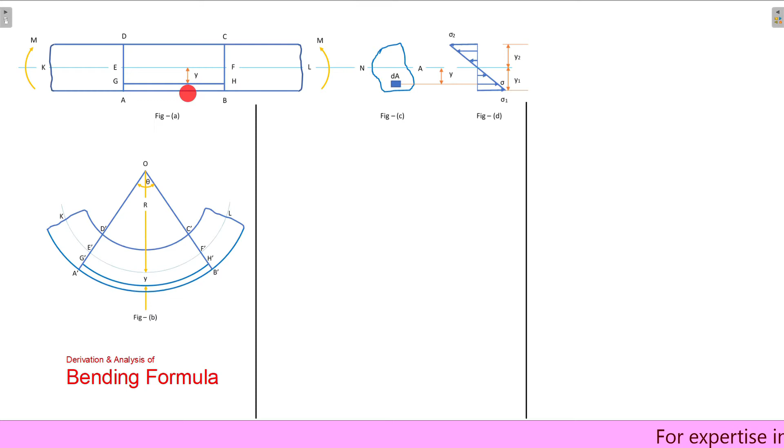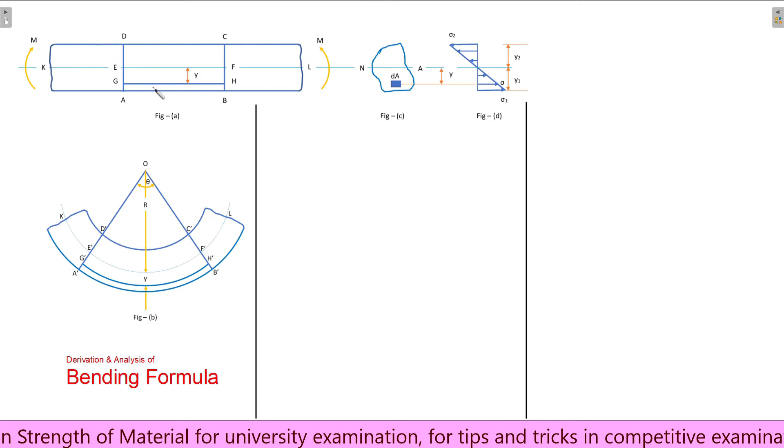Let us say we have a beam portion which is subjected to simple bending as shown in figure A. The direction of bending moment is clearly visible with these yellow arrows, and from this direction of moment we can see the beam will bend something like this, or we can say the beam will sag. This means at the top surface of the beam CD the compressive stress will be generated, and at the bottom surface at AB the tensile stress will generate.

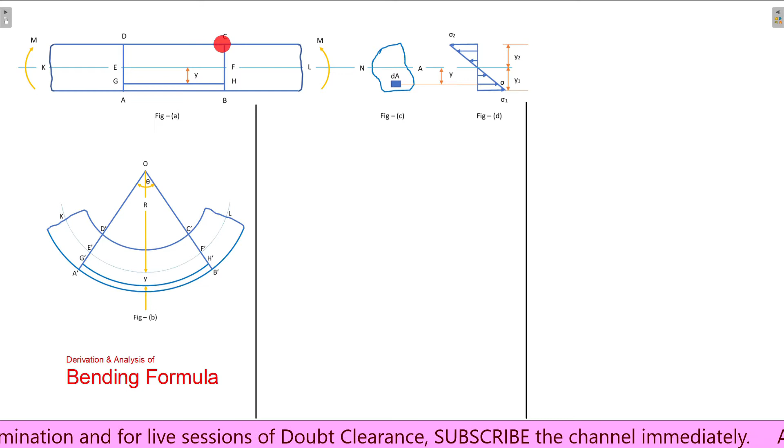नाउ इन अनस्ट्रेन्ड स्टेट, मीन्स जब बीम के ऊपर कोई बेंडिंग मोमेंट एक्ट नहीं कर रहा है, लेट अस टेक द फाइबर GH जो कि सेंट्रोइडल एक्सिस EF से y डिस्टेंस पर लाई करता है, और इसके दोनों एंड्स पर ट्रांसवर्स पैरेलल प्लेन्स AD एंड BC एग्जिस्ट करते हैं। नाउ आफ्टर बेंडिंग, plane AD and BC will take positions as A dash D dash and B dash C dash respectively, as shown in figure B.

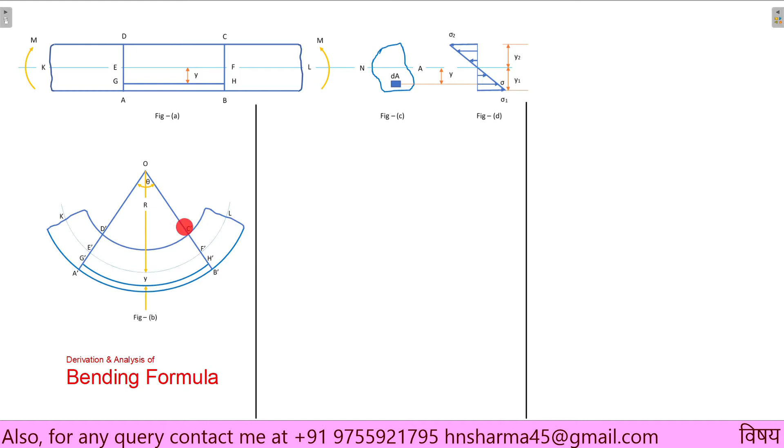Now both the planes are inclined at an angle of theta with each other and intersecting at point O, which is the center of curvature. Let us say capital R is the radius of curvature of centroidal surface E dash F dash. Then radius of surface G dash H dash will be R plus Y.

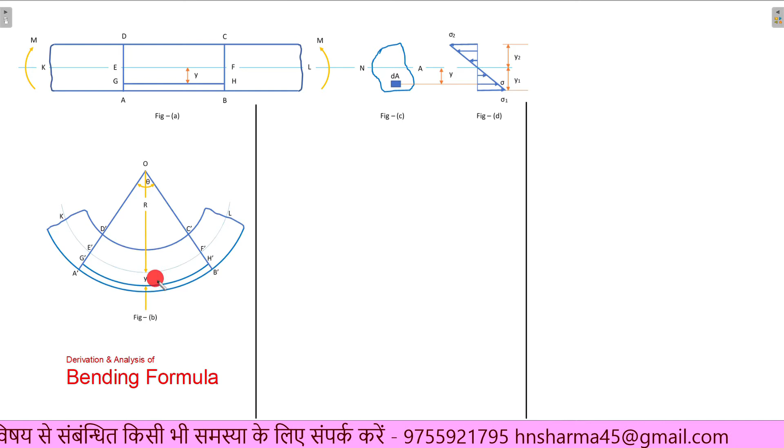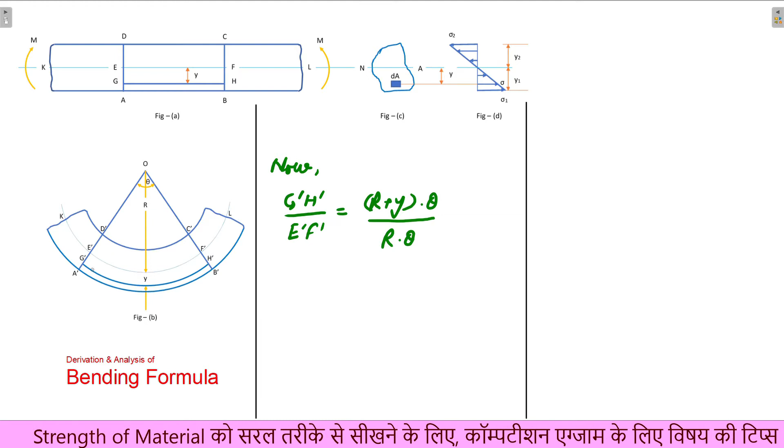Now the ratio of G dash H dash and E dash F dash will be R plus Y dot theta by R dot theta. G dash H dash is an arc, and हमें पता है the length of arc will be equal to radius of the arc into included angle. So the radius of G dash H dash is R plus Y and included angle is theta. Similarly for E dash F dash this is R into theta. So this will become R plus Y by R. Let us say this is equation number 1.

Now हमें मालूम है कि EF is सेंट्रोइडल एक्सिस, इस पे स्ट्रेस वैल्यू 0 होगी मींस स्ट्रेन भी 0 होगा, यानी ना ही सेंट्रोइडल एक्सिस में एलोंगेशन होगा ना ही कॉन्ट्रैक्शन होगा। So we can say that E dash F dash will be equal to EF, and hence from equation 1 it implies that G dash H dash by EF is equal to R plus Y by R. Let us say this is equation number 2.

Now let us say strain in fiber GH is epsilon, and strain means this is change in length by original length. So change in length means after bending the length is G dash H dash, before bending the length was GH, by original length, this is GH. So this is equal to G dash H dash by GH minus 1. Now we can easily see in figure A that GH will be equal to EF.

So we can say that epsilon is equal to G dash H dash by EF minus 1. Now putting the value of G dash H dash by EF from equation 2, we will get that epsilon is equal to R plus Y by R minus 1, which means this is equal to Y by R.

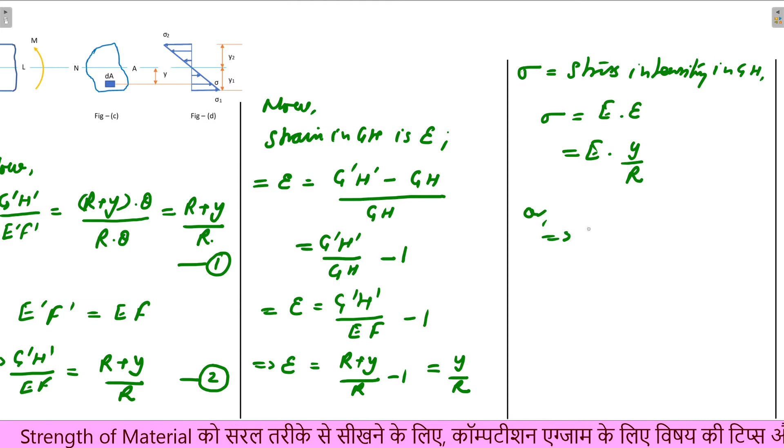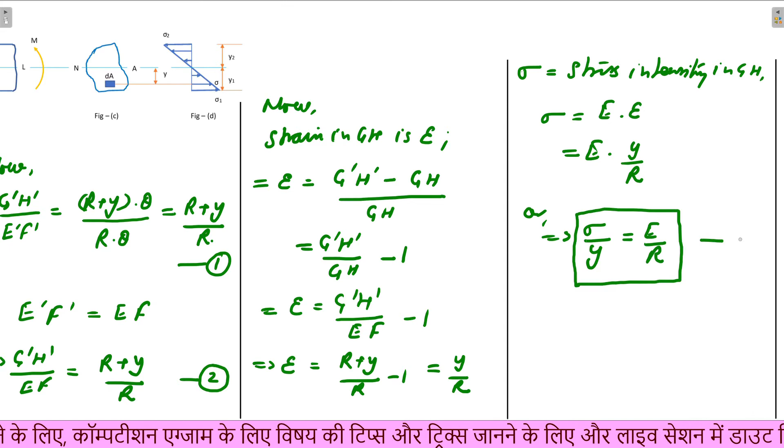Now if sigma is stress intensity in fiber GH, then we can say that sigma is equal to E dot epsilon, where E is the Young's modulus, or we can say this is equal to E dot Y by R, or this will be equal to sigma upon Y is equal to E by R. This is the first half of our bending formula, and let us say this is equation number A.

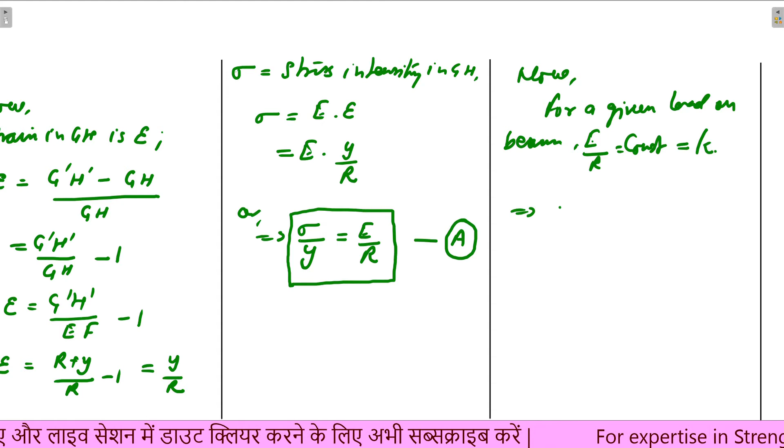Now for a given load on the beam, the value of E by R will be constant. Let us say this is equal to K, so it implies that sigma will be equal to K dot Y, and from here we can say that sigma is directly proportional to Y. This is a very important relation.

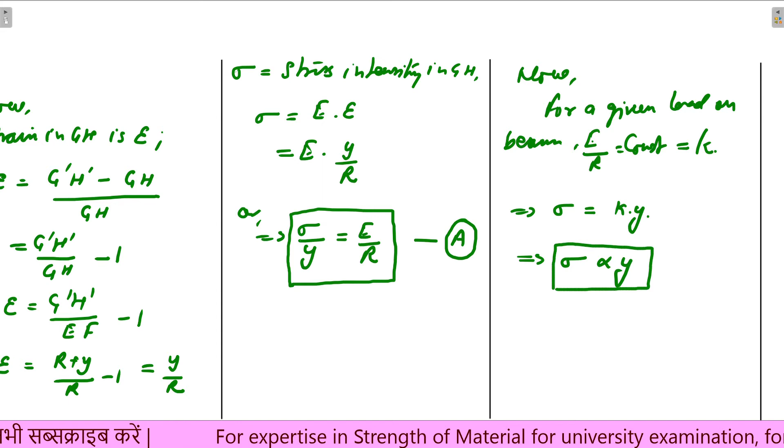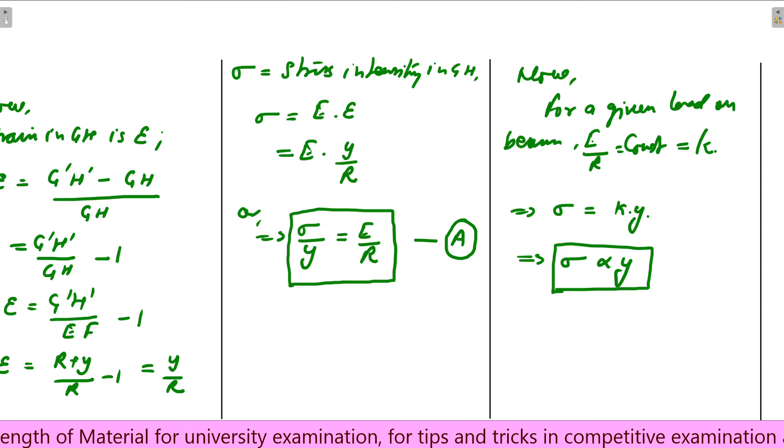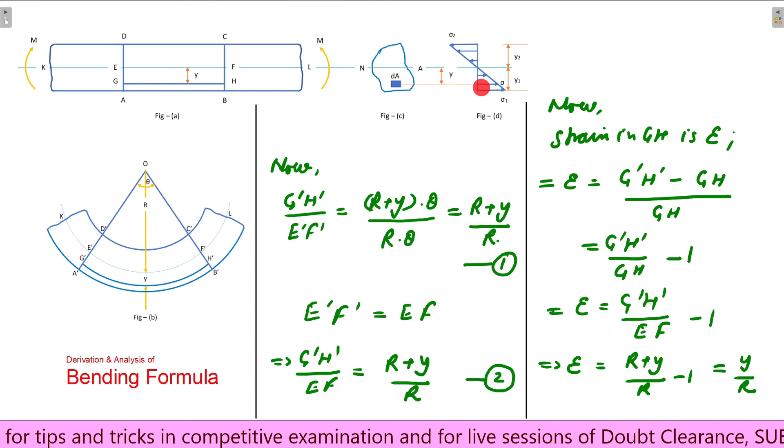अब ये हमें बताता है कि हम जैसे जैसे सेंट्रोइडल एक्सिस से दूर जाते जाएंगे, बेंडिंग स्ट्रेस की वैल्यू बढ़ती जाएगी, and it will be maximum at the boundary of beam which is at the greatest distance from the centroidal axis, जो कि हम फिगर D में देख सकते हैं। यू सी इन दिस फिगर D कि जैसे जैसे हम सेंट्रोइडल एक्सिस से दूर आते जा रहे हैं, वैसे वैसे स्ट्रेस की वैल्यू बढ़ती जा रही है।

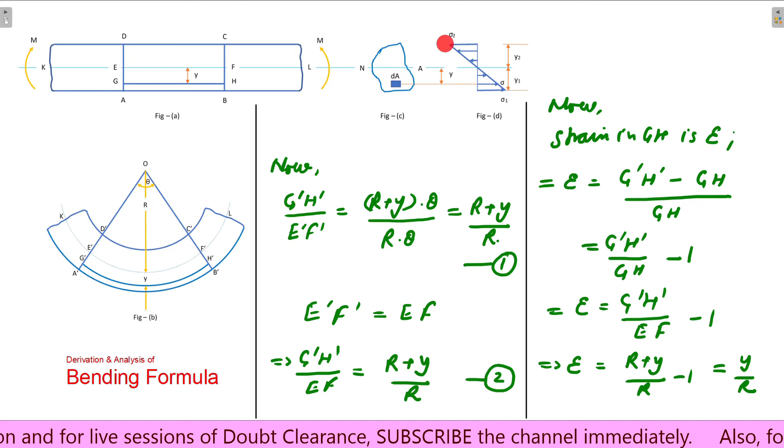हम नीचे की तरफ आते हैं, then at the bottom this is the maximum tensile stress sigma 1, and at the top this is the maximum compressive stress sigma 2. Okay, now let us locate the position of neutral axis। अब हम neutral axis की position को locate करेंगे।

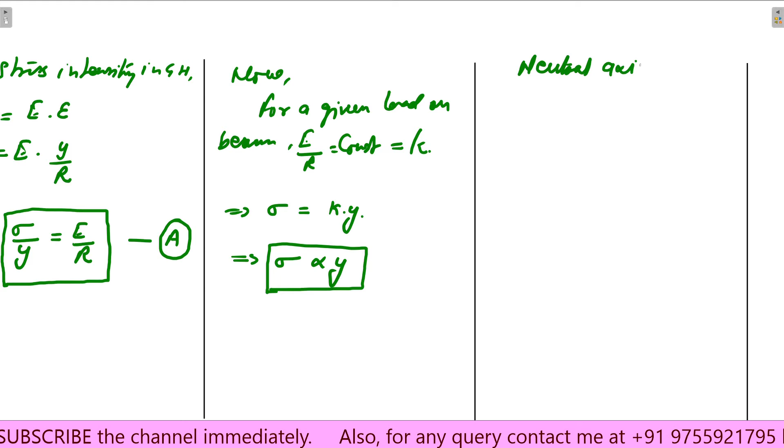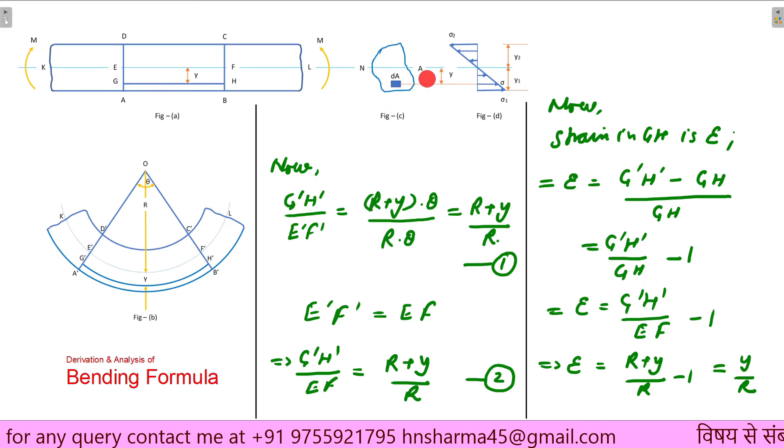Now to locate the position of the neutral axis, we will consider an elementary area dA of the cross section. This is dA, which lies at a distance y from the centroidal axis, as we can see in figure C.

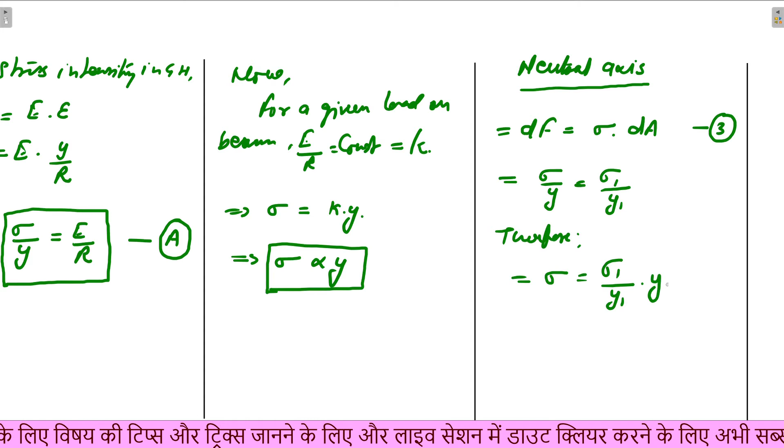Therefore we can say that sigma is equal to sigma 1 upon y1 dot y. Now putting this value in equation number 3, we get dF is equal to sigma 1 by y1 dot y dot dA. Let us say this is equation number 4.

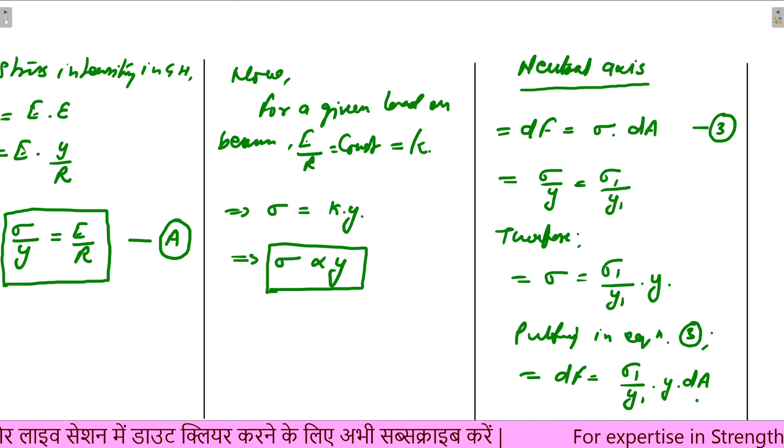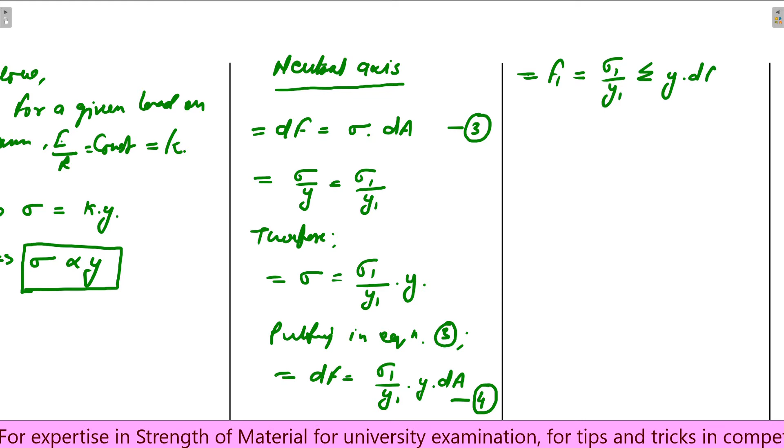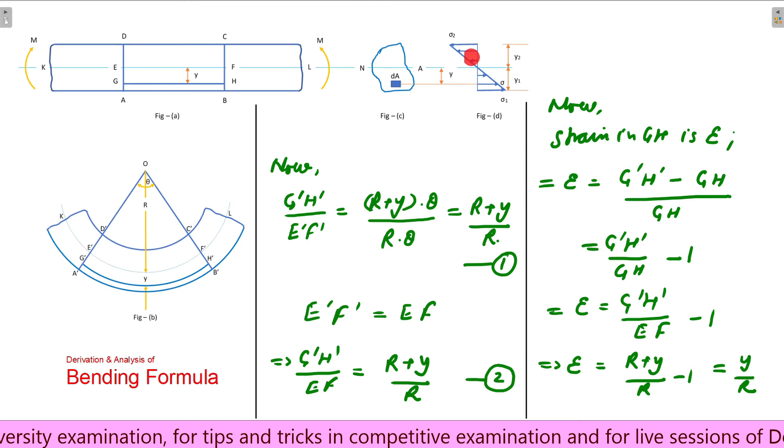Now we can say the total tensile force on the transverse section below the centroidal axis is F1, and F1 will be sigma 1 by y1 into sigma y dot dA. But if we take the elementary area dA above the centroidal axis, the total compressive force on the transverse section above the centroidal axis will be F2, equal to sigma 2 by y2 into sigma y dot dA.

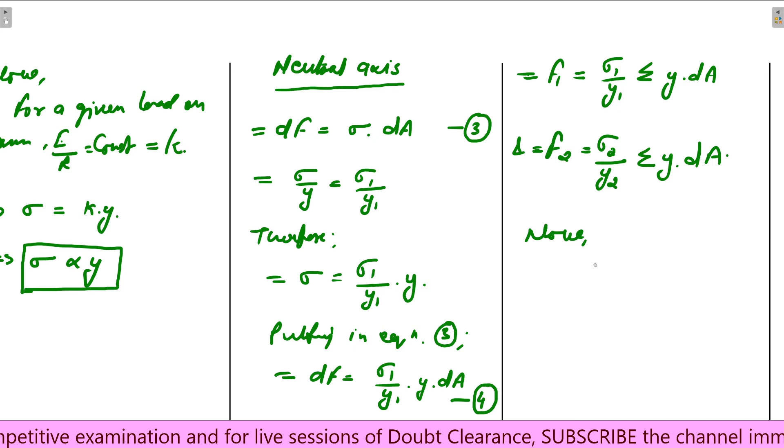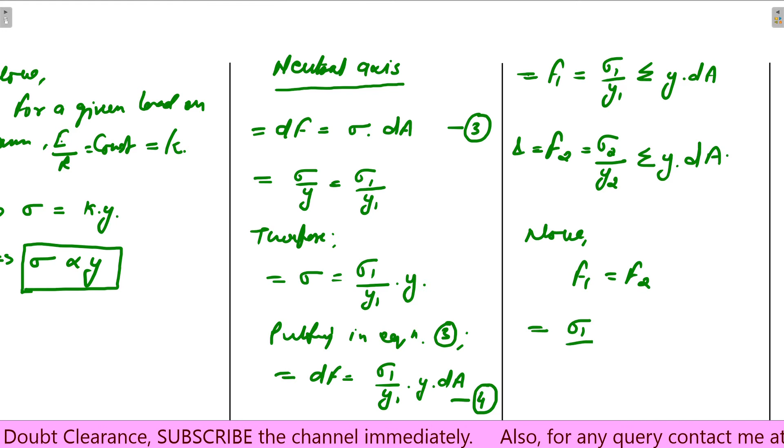Now since our beam is in equilibrium, for the equilibrium of the beam we can say F1 will be equal to F2, and putting the values from the above equations we get sigma 1 upon y1 equal to sigma 2 upon y2. Let us say this is equation number 5.

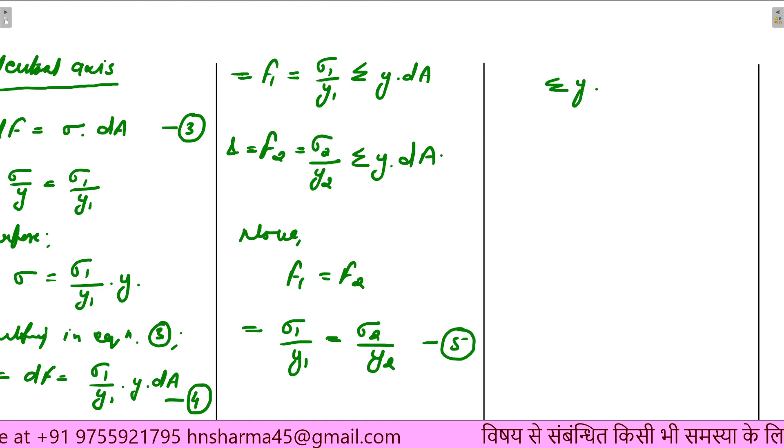Further, since there is no resultant force across any transverse section, it means sigma y dot dA will be equal to 0. This means the first moment of area about the centroidal axis is 0, and this is only possible when the neutral axis passes through the centroidal axis.

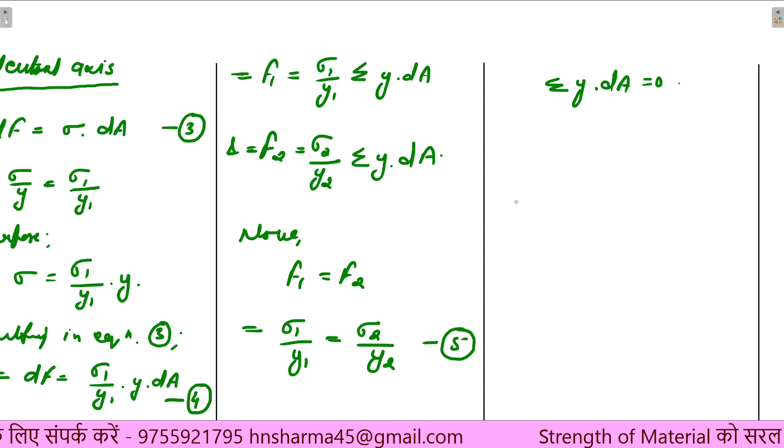Hence in case of simple bending we can say the neutral axis passes through the centroid of the section, meaning the neutral axis and centroidal axis are the same. So here we have proved that in the case of simple bending, the neutral axis will be the same as the centroidal axis.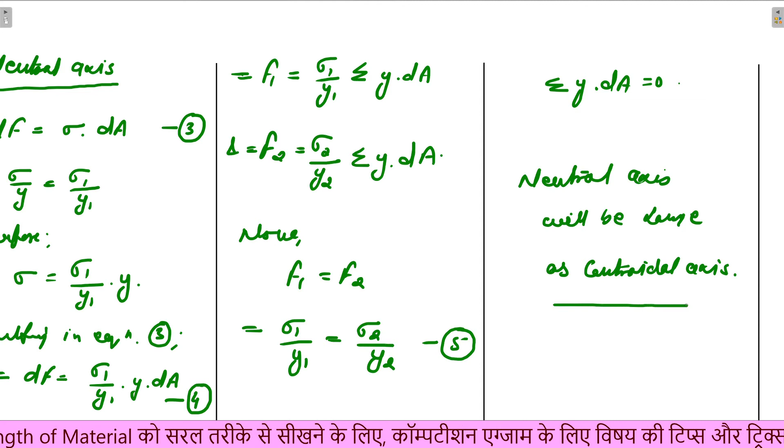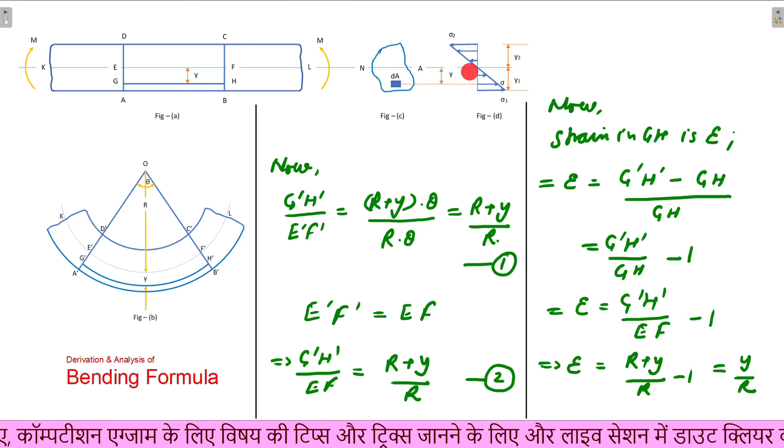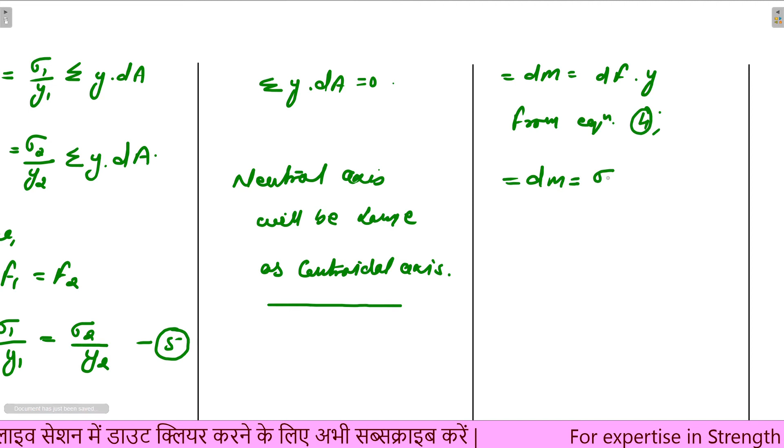Now due to the force acting on the elementary area dA, the moment generated about the neutral axis, let us say that is dm, and dm is equal to force into distance. Now putting the value of force from equation 4, we get dm is equal to sigma 1 upon y1 dot y square dA.

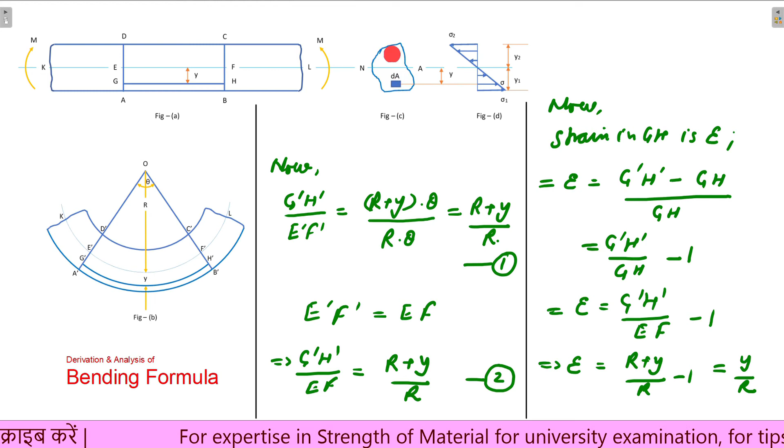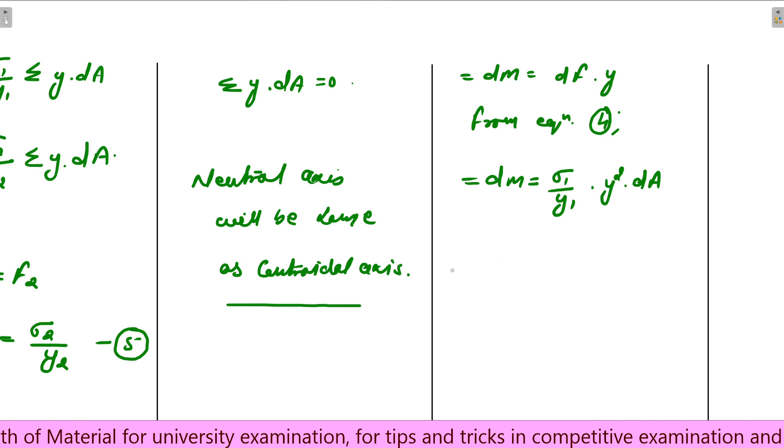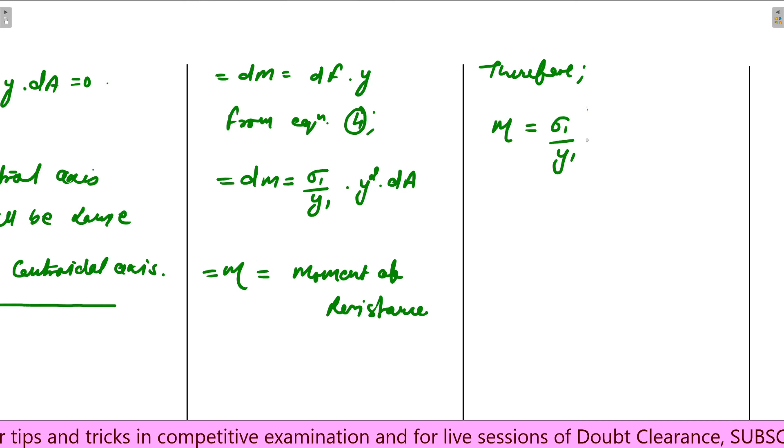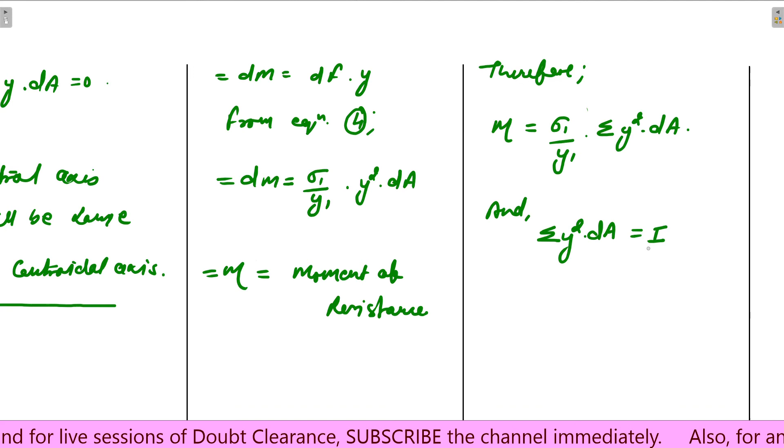Therefore we can say total moment m will be equal to sigma 1 upon y1 dot sigma y square dA, and we know that sigma y square dA is equal to I, that is the moment of inertia of the cross section about the neutral axis.

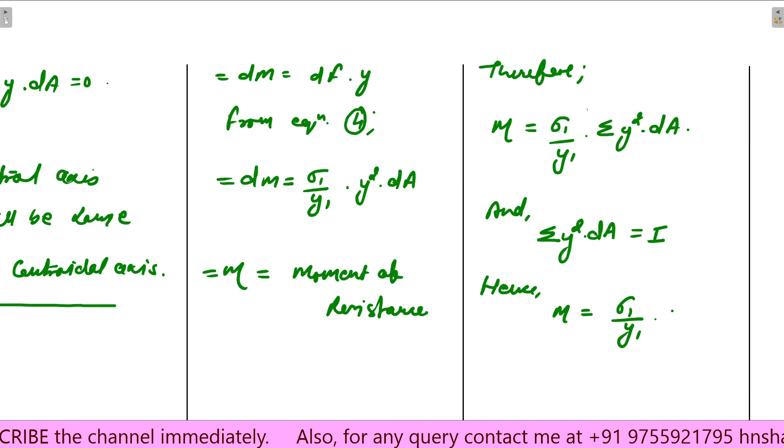Hence we can say m is equal to sigma 1 upon y1 dot I, or m upon I is equal to sigma 1 upon y1, or we can say m upon I is equal to sigma upon y. This is the second half of our bending formula. Let us say this is equation B.

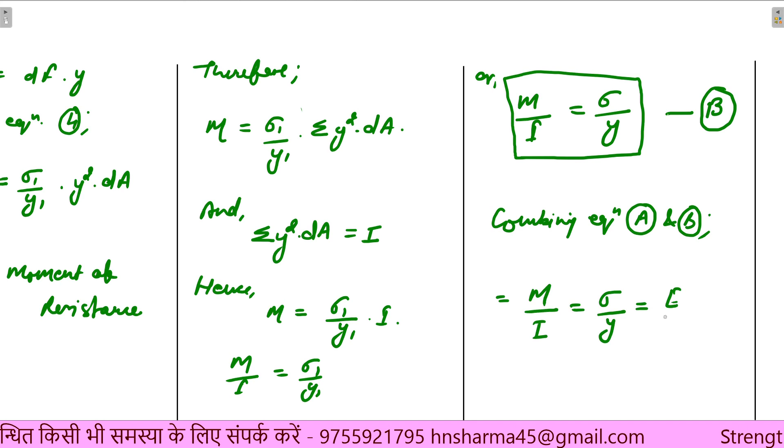So now combining equation A and B, we get that m upon I is equal to sigma upon y is equal to E by R. And this is our final bending formula.

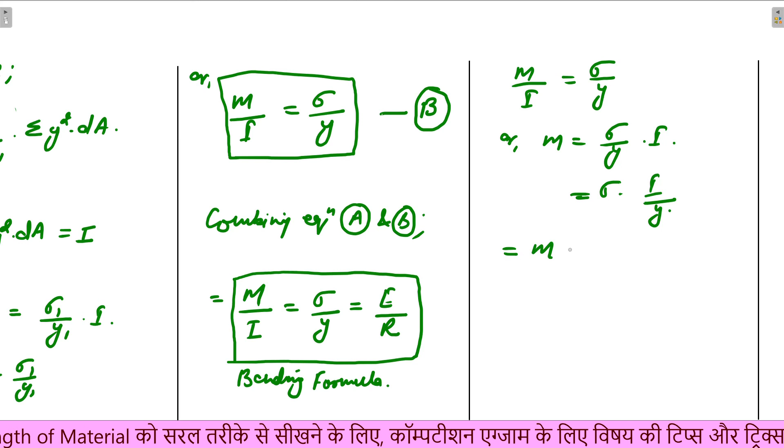From this bending formula we can say m upon I is equal to sigma upon y, or m is equal to sigma upon y dot I, or sigma dot I upon y. Finally, I can say m is equal to sigma dot z. This z is equal to I upon y, and this z is known as the section modulus.